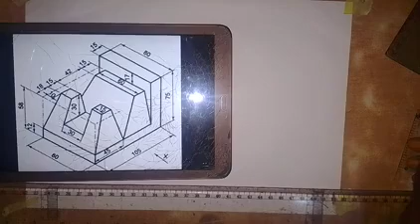Welcome to my channel, and here we are going to be working on the orthographic views of this object, as you can see on the screen.

Let's look at the direction of view. We are looking at the object in this direction. That means we are going to be producing the front elevation in this direction, and then the dimensions on the object as we have here.

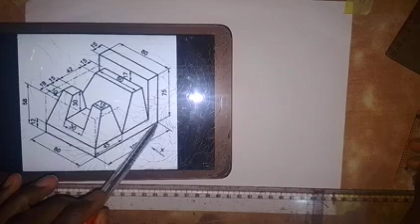So we have the distance from here to this end here is 105, and then from this point to this point here is 45, and then we have the height from here to here is 75 millimeters.

This is square, and we have the dimension to be 15 millimeters for the front elevation. So from here to here is 15 millimeters.

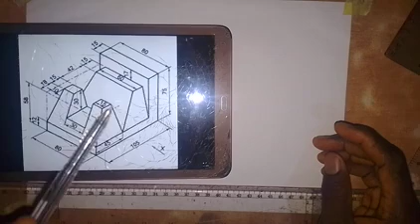So for the front elevation, what we want to produce is this L shape, and also this shape here and this shape here. That is what we want to produce. So we'll be making use of these dimensions to produce the front elevation of this object.

So let's go and see how this can be. Before we go on that, distance from here to here is 15, and then from here to here is 12 millimeters. So let's start and see how this construction can be done.

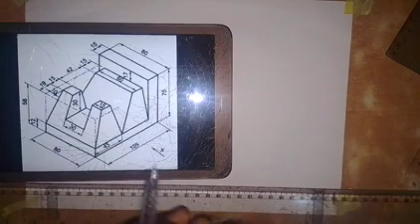So what we are going to do is produce the front elevation, produce the plan, and also produce the left end elevation, which should be placed on the right side of the front elevation. So let's go and see how it can be done.

The first thing that we are going to do is draw the horizontal line. So I'm going to draw a horizontal line all through the whole of this page, and then I'm going to draw a vertical line, coming somewhere around here, dividing the whole page into 4 equal parts.

So the next thing that I'm going to do now is take a dimension from this end here, from this end to this side. So that is how I'm going to take the dimension, and it goes like this.

Okay, so the first thing I'm going to do is take a measurement of 105 millimeters. I'm making use of this set square to take the dimension. This is 100 millimeters, then I will take 5 millimeters in addition to that.

So this is 5 millimeters here. So I will now go in this way. So that's the total length. So I will take the height. The height of that L shape that we want to produce is 75 millimeters.

Having taken this dimension, the next thing that I'm going to do is at this point here, draw a vertical line. So I will draw a vertical line, just take it up a little bit, and then take it down because of the plan.

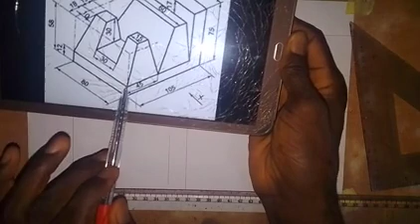So other things that we have to add to this for the front elevation are these. Let's see how we are going to produce them. Starting from here, we have that from here to here is 45. So first of all, take a measurement of 45 here.

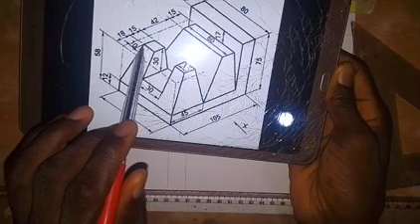Coming to this dimension, for us to get this point, we will take a measurement of 18 millimeters from here to here. So from here to here, we take 18 millimeters so you can get this line, and then we take 15 from here to here. So it's only this 15 that we have to get.

Then you can draw this line and this line. Let's do that before we continue. So let's take a measurement of 18 millimeters. This is 18 millimeters here. Okay, we have this 18 millimeters.

Then I will now take 15, so 15 millimeters. So this is 15 millimeters. Then from this end, I will now take a measurement of 45 millimeters. So this is 45 millimeters here, like this.

So let's see how we are going to produce this. What I'm going to do now, at this point, I'm going to draw a vertical line down, and also at this point I will take a vertical line. So draw a vertical line.

Okay, so then I'll just leave this. For this one I will take this vertical line down, because of the plan that we are going to produce. So other things that we are going to do here, let's quickly look at that.

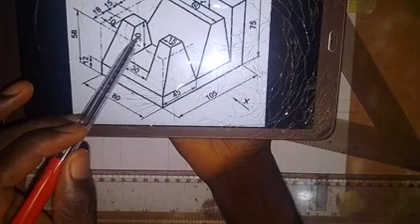Now for this point that we have here, for us to get from, we have to take a measurement from here to here is 30. So for us to get this top face is 30 millimeters, and then so this slanting face that we have here.

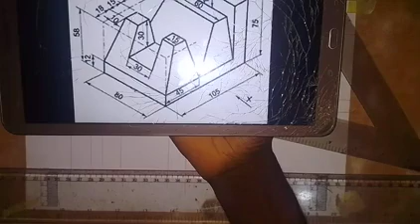So for us to get this top face, this face here and this top face here, they are the same level, so we have to take 17 millimeters down. Okay, so we take 17 millimeters down.

So later, for us to get, we need to, because this part is going to be hidden from us, we have to take 30 millimeters down. So let's quickly do that.

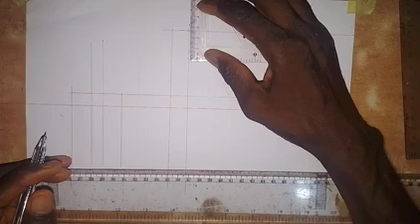So I will come up here, I will come here and take a measurement of 17 millimeters. Just let me take it. So 17 millimeters down. So this is 15 and this is 17 millimeters. Okay, so we have that.

So at this point I will draw a horizontal line. Here I will draw a horizontal line, like this. Okay, so I've gotten that top face that we have here.

Okay, this is 15. So not okay, I think I took 10. That was wrong. So this is 15. Okay, so here is 15 millimeters.

So this line is not supposed to be there. So I'm going to draw a vertical line, it goes up like this. Okay, so we have this.

So now I can go and bring out that shape by joining this point. So this is a non-isometric line. So we join this point together with this, like this. And then this point also, we join it together with this point.

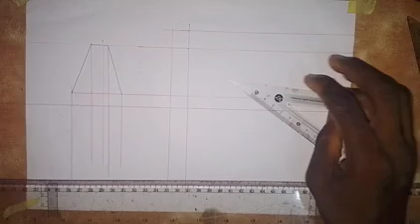Okay, so then I will make this surface, I'll make it a thick line from here to here. So we have this. Okay, and other thing that we have to put here, so there is a part that is hidden from us in the front elevation, which is 30 millimeters down.

So we take a measurement of 30 millimeters. Okay, so here I'm going to draw a horizontal line through this, and it goes like this. All right, so we have that.

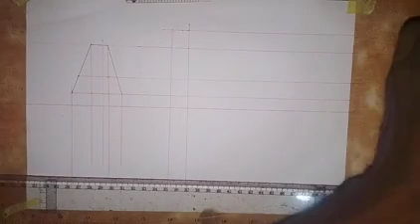Okay, so let's leave it like this for now. So we come back and perfect that hidden part, but we still have this to produce, so we have to draw this. Okay, and then from this surface here, to this point is 15. So it is that 15 that we are, once we get this point 15, we have to join it with this. So this is going to form a straight line.

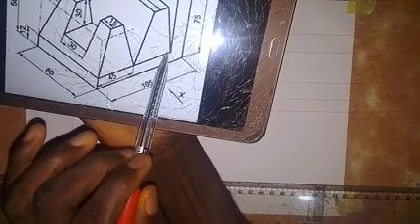It's going to form a straight line. It's not going to bend. It's going to form a straight line. Okay, let me see how it goes.

So what we are to do now is to take a measurement of 15 millimeters. This is from the surface, taken from the surface here. This is 15, taken from the surface, and then it is now joined. So we now join it with this one, like this.

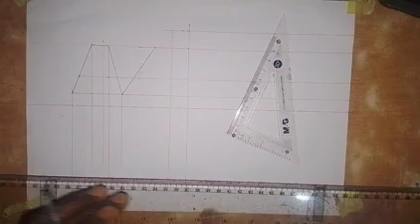So that line is going to be a straight line in the front elevation. This line will be a straight line in the front elevation. It's in the end elevation that we are going to... it's going to be a straight line in the front elevation. So we are going to have it as a straight line in the front elevation.

All right, so we are going to make this line a thick line. So make this line a thick line like this, and then this line we also make a thick line. All right, so then this line is also a thick line as we have it in the plan.

Sorry, in the front elevation. This line also, so from here to here, is also a thick line from here to this end here. Then we also make this line a thick line like this. So this line is going to be a thick line all through.

So the line that is bent here will be shown in the plan. That's how it's going to be. All right, so we have the front elevation in place. Then this part is hidden as we see it there.

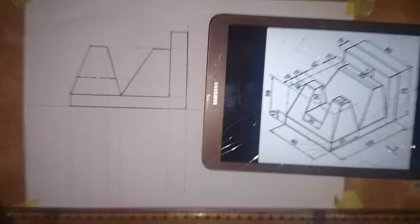All right, so we have this. All right, so let's go for the plan. So let's work out the plan.

For the plan, we see this rectangle here, and then we are going to see this rectangle. So we see this surface, the surfaces, and then we also see this surface here. Okay, so let's look at the dimensions.

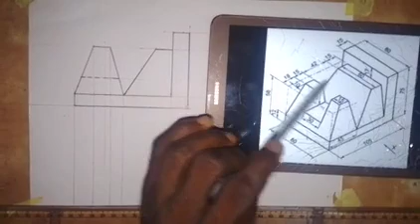This is 80 millimeters, and from here to here is 60 millimeters. So this length is 60 millimeters, and this is also 15 from here to here. This is also 15 from here to here. Okay, so that's what we have, and from here to here is 30. So we need to work that out.

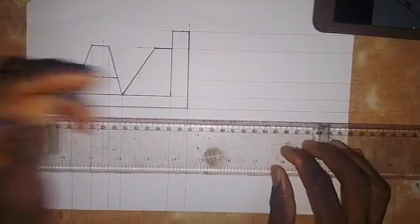Now let's see. So the first thing that we are going to do is to come down a little bit from the front elevation, and we draw a horizontal line like this. Then we are going to take a measurement of 80 millimeters down. So this here is 80 millimeters. Having taken this 80 millimeters, we are going to draw a horizontal line all through like this.

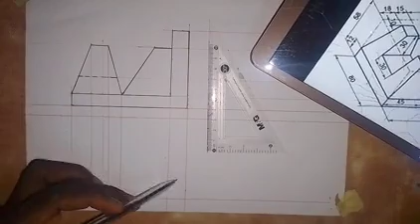Okay, so then the next thing that I'm going to do is that you look at this rectangle. This rectangle here is already out, so we have it along this part. So this is the rectangle. We only need to bring out this rectangle here, which is of length 80. That means you have to take 10 millimeters from here and then 10 millimeters from here. So this 60 will come out, and we have that rectangle.

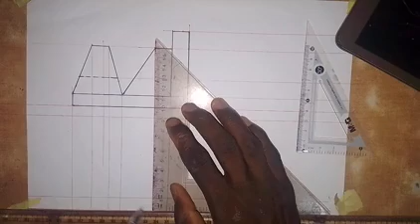And before we can have that rectangle, I have to draw a vertical line from this point, so that we can have that rectangle. Immediately we take the measurement of 10 from both sides. So we draw this as a vertical line, and then I will now take a measurement of 10 millimeters from this line down. Okay, then I will come down here, take 10 millimeters from this line up. Then I'm going to draw a horizontal line.

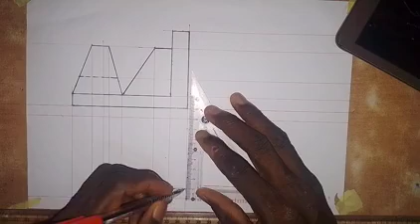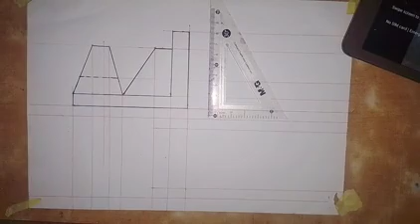So draw horizontal line from here to here. So I don't have to draw it to this side. So I will also draw horizontal line from here to here. Alright, so we have that rectangle within this part. Then the other thing that we are going to have here, so we need to bring out this 15 and also this 15.

Looking at what we have here, to get this line, we have to take a measurement of 10 from here to here. The same thing also applies to this, we have to take 10 for us to get this. So that 10, we have already taken.

So that 10 that we took to get this line, we have already taken, so we have to take this line forward now. We bring it down here, and also we take this down to this point.

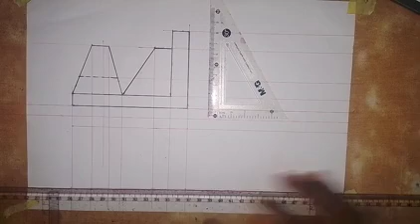So we now take that 15. We take 15, so this is 15 millimeters. Then we also take 15 from here to this point, this is that 15. So we need to draw this line, so we draw it.

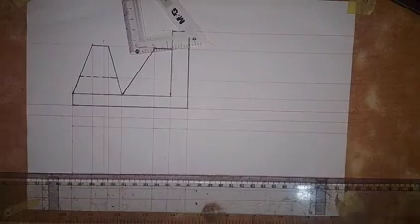To this end. Then we also draw a horizontal line from here, taking it to this end. So we have that. Everything that we need is already there, so all we have to do now is bring out the shapes that will give us the plan.

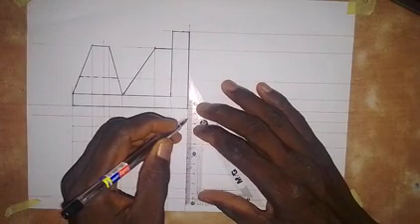So we draw this as a thick line. This line also is a thick line from here to this end. This line from here to here is a thick line from here to here. Then, so now make this.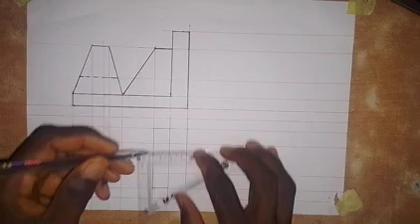So that rectangle that we have here is out now. We also make this line a thick line from here to here, and we make this also a thick line from here to here.

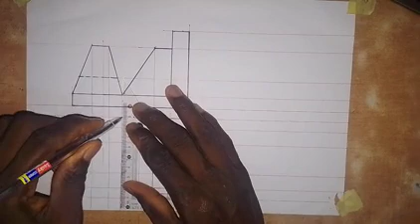So we have that. The other thing we have here, we are going to have a line from here to this end. So we have a line from here to this end, so we have it like this.

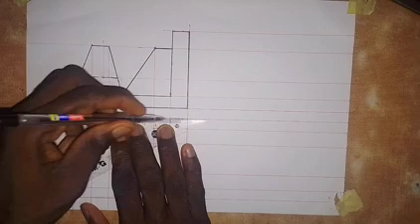This line all through to this end will be a thick line, to be a thick line. This also will be a thick line all to this end here, to be a thick line. So we have it like this, and then this line will also be a thick line all through to this end. Then we have this shape here.

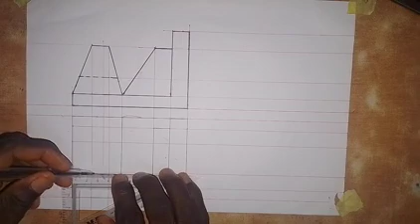So, sorry, this is where we have it. So we also have it here.

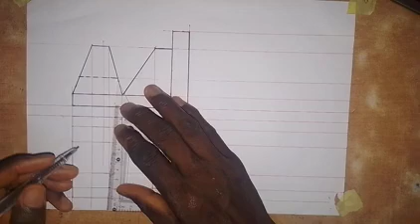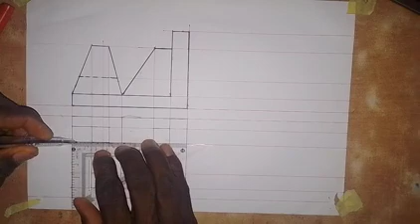So this line goes to this point. This line here, as this line is bent, we are going to have it drawn like this. And the same thing here, drawn like this.

Okay, so this will also be this line, as we have it here. So we also have this line being made a thick line. The same applies to this, to go from here to this end, and this also will go from here to this end. So we have it like this, this is how it's going to be.

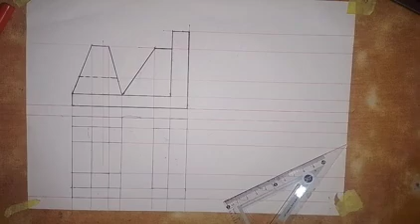Looking at what we have here, and also this line, we also need to make this line, as this line is bent here. So we also have, okay, so we come here. We also have this one, so we have it like this.

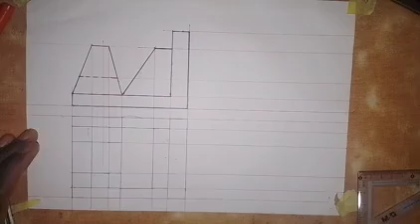Alright, so this is what we have as the plan. For the top view, this is what we have, so let me show you the parts one by one. This rectangle is here, this is where we have it. And then this two squares, so we have them here and here.

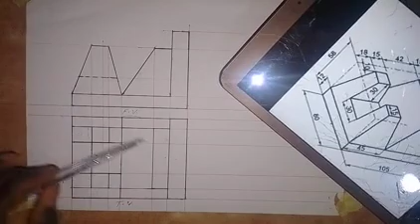So this is how the plan will look. All the lines that we have here, they are there perfectly as we see it here. So this is what we have now.

So let's go and draw the end elevation. Let's go and draw the end elevation. For the end elevation, we are drawing the left end elevation. That is what we are drawing.

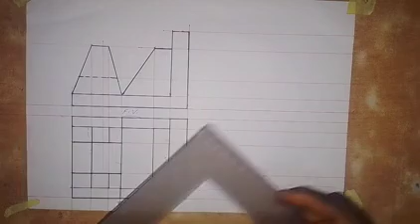So what we have to do now is to take our 45 degree set square, place it at this point on the front elevation, and then we are going to draw this line at an angle of 45 degrees to the horizontal.

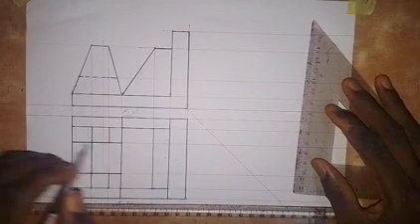So every point where this line meets all this horizontal line that we have here in the plan, we have to produce a vertical line from each of them. So we draw a vertical line here, and coming to this point, we draw a vertical line. We draw a vertical line here too.

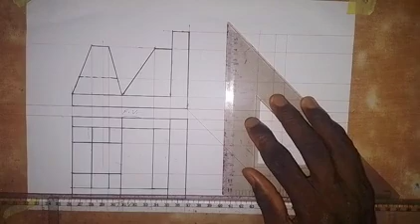Also from this point, we draw a vertical line from this point up. Then coming to this point, we also draw a vertical line. Then from this point, we draw a vertical line here. Alright, so we have all this.

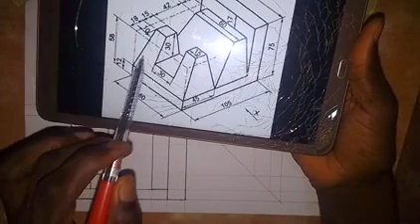So let's see what we are going to bring out here. We are producing the left hand elevation. We are going to see this surface like this, and then this surface will come out. This little part will come out, and then we see this line, and then this surface. So those are the things that we are putting together. This surface, as we see it here, we are going to see it in the end elevation. So let's start and see how it goes.

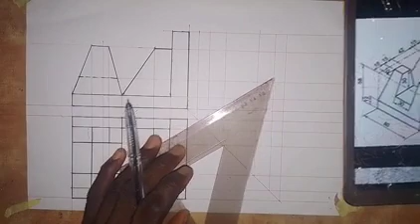First of all, I'm going to start like this. Draw this line. So this line that we have here, we are going to see it. First of all, make this line a thick line from here to this end, like this.

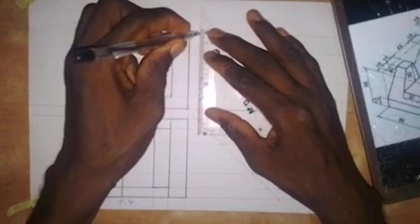So we have it from here to this end, and then this line, we are going to make it a thick line from here down. So from here down, we have it as a thick line, and this line will also be a thick line from here down, and this line also, from here to here, like this.

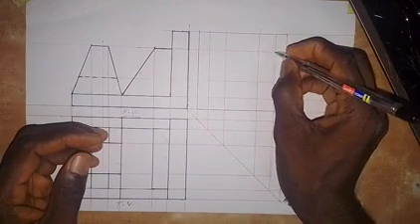Alright, so then this line that we have here from here to here, which is 60, let us trace it. So up here, we have it up here, and then we go on this. So this line will be a thick line all through from here to here. Okay, so we have this.

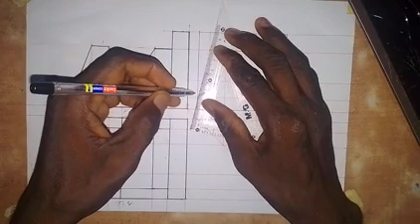Now we are going to join this point together with this point here. So we have this joined with this, and then we have this joined with this.

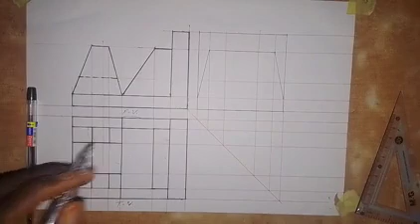Alright, so note this. In the front elevation, this will be a vertical line. This line will be a vertical line, so that is what I want to show you there. So it means we have to make this line a vertical line. It is from here as we have it. Let me bring it again. So it will be a vertical line in the front elevation, and in the end elevation it will also be a vertical line, and then we have this shape brought out.

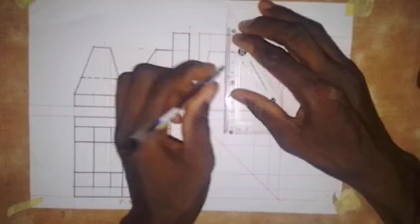So it is from here to here, and then this also is from here to here. Okay, and then make this line a thick line from here to this end. So that is what we have there.

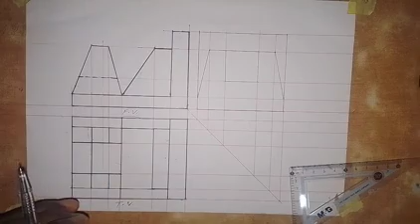So what other thing do we have here? This line at this point will be hidden, so we have to draw it here. It's along this line. So we draw it with a short dashes line like this.

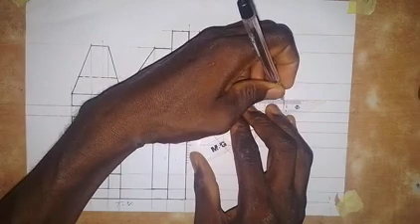Okay, so that is what we have there. Alright, so this is what we get for the orthographic views of this block. This is the front elevation, the top view, and also the end view. So it's as simple as I've done it here. All you have to do is practice. Thank you. Keep on practicing, and God bless you.